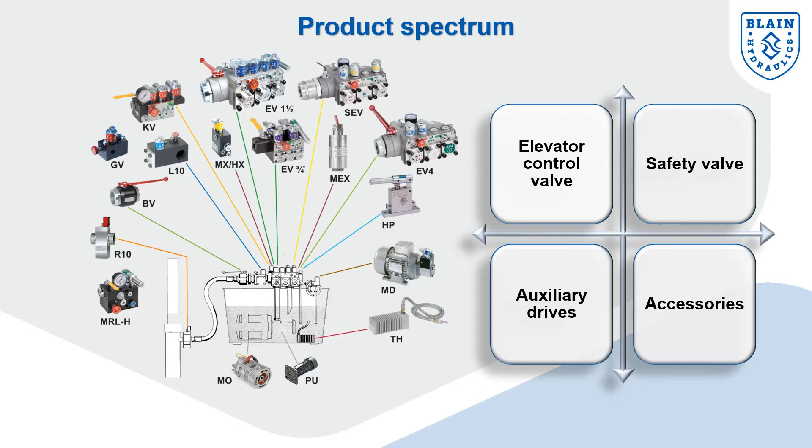The Blain flow control valve is the core of all products. The product segment covers the mechanical, servo and VVVF-driven valves, covering a very wide flow and pressure range. Within the mechanical valve segment, there is a choice of single and 2-speed valves. The EV and KV series offers 4 variants with varying comfort and features.

The servo-electronic valve SEV07 and VVVF valve products, namely EV4 and EV40, are smart valves in their respective categories. The servo-electronic valve is a closed-loop proportional solenoid valve which is controlled by an electronic card. It's an ideal solution for applications where consistent travel comfort is needed independent of change in load and temperature.

The VVVF system works with the Yaskawa inverter and is a closed-loop system. The inverter and the valve are not connected with each other, leaving the customer with high flexibility on the deployment side. A temperature and pressure sensor in the valve relays real-time information to the inverter, which can take corrective action guaranteeing highest comfort and energy saving.

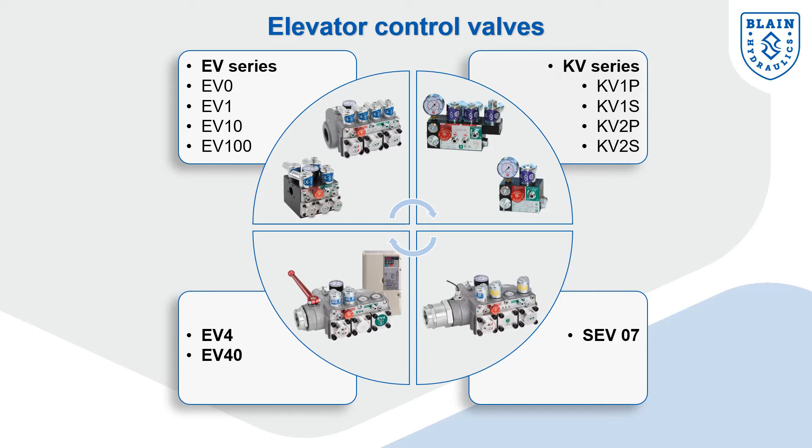EV4 and EV40 are ideal for modernization projects wherein an existing Blain valve can be upgraded to a smart modern VVVF system, offering up to 60% energy savings and ultimate ride comfort irrespective of change in load and temperature.

The safety valve matrix is somewhat similar to the control valve. The pipe rupture valve R10 is available from 0.5 inches through 3 inch sizes with a large range of different connectors and mounting options. Sometimes referred to as a parachute valve, the R10 can be compared to an airbag of a car.

In the event of failure in the main cylinder line or where the downspeed exceeds allowable limits, the R10 valve closes, bringing the car to a smooth stop.

The UCM A3 safety valve is a solenoid-operated check valve designed for hydraulic elevators and includes a self-closing manual lowering valve. Its purpose is to allow free flow of oil from the pump unit to the cylinder for upward travel, and to prevent flow in the reverse direction from the cylinder to the pump until an electrical signal is given to the solenoid. The L10 can be mounted in any position without causing any operational problems.

Like the R10, the L10 is also available in different sizes to suit the flow range of the elevator.

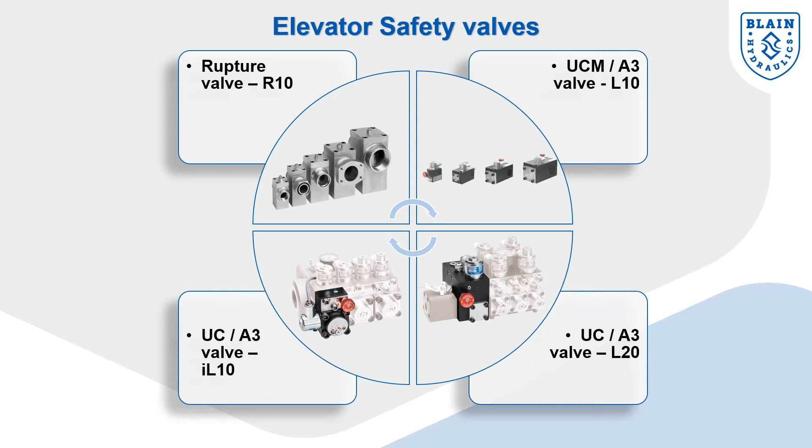Blain introduced the integrated version of the UCM A3 safety valve so as to ease the integration of the product without any extra adapters and fittings. This makes any existing installation very easy to modernize. The integrated option of the safety valve makes the complete unit very compact and reduces pressure losses and heat generation. It also saves the cost of fittings and labor which is otherwise needed to resize or change the existing piping on the site to accommodate the UCM A3 safety valve during modernization.

To round up the product segment, Blain offers a wide range of product accessories that tightly integrate with the main product. For example, the hand pump and the ball valve can be directly mounted on the main body of the valve without the need of any adapters.

Likewise, the MRLH rescue unit can be used for rescuing trapped passengers when access to the machine room is not possible. Other options like tank heater can be tucked away inside the tank by means of onboard magnets and works seamlessly keeping the oil temperature between 20 to 25 degrees Celsius.

Extra downspeed or overspeed valves like the HX/MX can be very useful in testing the pipe rupture valve by simulating a free fall, or even be used in combination with the main valve to have an intermediate downspeed for test runs and inspection of the elevator.

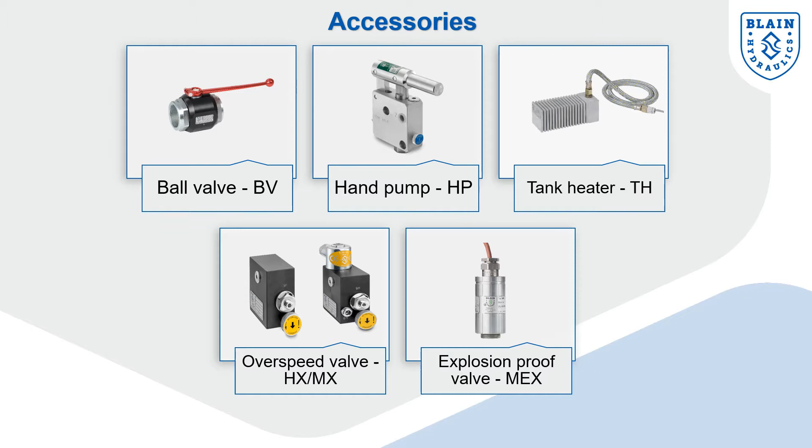For use with equipment and protective systems intended for use in potentially explosive atmospheres, the explosion-proof valve MEX comes in handy. This can be used in combination with any Blain solenoid valve where requirements mandate the use of ATEX-certified explosion-proof valves.

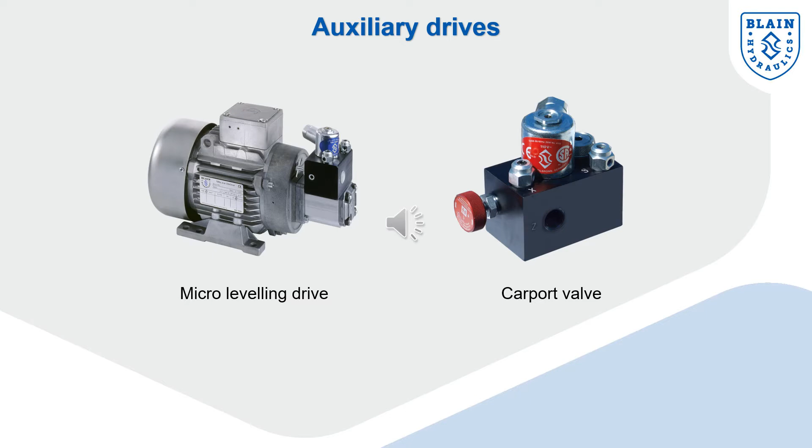Auxiliary drives or standalone units are very useful in fine leveling the elevator or even re-leveling in the event of sinking during loading and unloading of the cabin. The micro drive unit comes as a package made up of the motor, gear pump and the control valve.

Blain also has a standalone version of the valve commonly used for goods lift or car parking platforms.

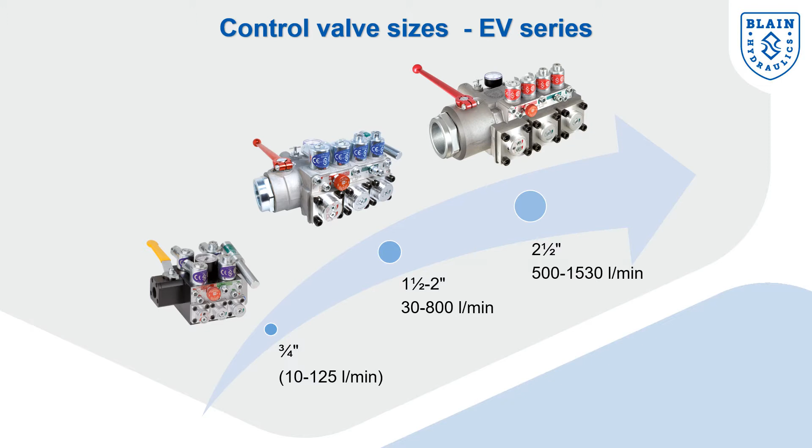The EV series of Blain control valves cover a flow range from 10 to 1500 liters and are available in 4 different sizes. The 1.5 inches and 2 inches valves share the same body but only differ in inlet and outlet ports. For flow range between 400 to 800 liters per minute, the 2-inch valve is recommended.

Options like integrated ball valve in the bigger EV valves can be selected while ordering.

All Blain valves are surface treated and hardened to withstand wear and tear and guarantee long life. A lot of spare parts within the different Blain valves are interchangeable, making it easy for technicians to swap and service the products on site if need be. The front-facing adjustments, lightweight aesthetic and compact design, and working life of over 25 years makes Blain valves the ideal choice for hydraulic elevators.

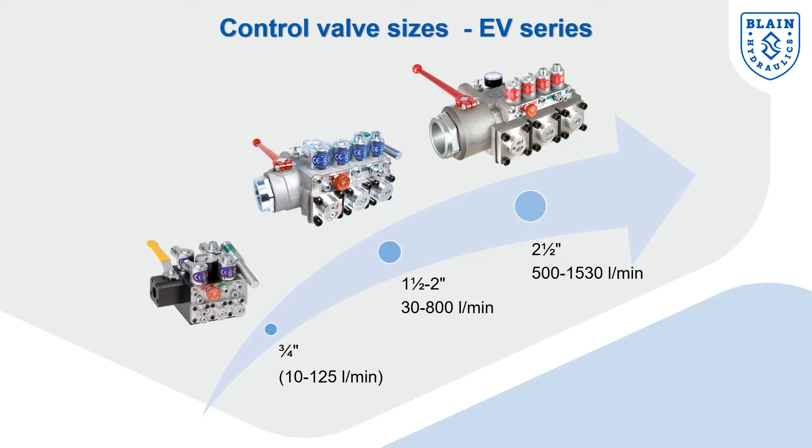The EV series valves have 4 variants, namely EV0, EV1, EV10 and EV100, which can be used in all kinds of elevator applications depending upon the ride characteristics required by the customer. Within the individual variant, different sizes from 3/4 inch to 2.5 inches are available.

The KV series valves are mainly designed for small lifts with single-speed application. It also has 4 variants, namely KV1P, KV1S, KV2P and KV2S, which are used in goods lifts and small home or villa lifts. Even though the KV valves are very small and compact, the design still conforms to the EN regulations.

The most important unique feature of all Blain flow control valves is that they are all designed exclusively for hydraulic elevator applications, unlike competing products which have modular blocks screwed into each other with basic design very much borrowed from the industrial hydraulics domain. The top-to-bottom Blain design results in low pressure losses and tighter integration of necessary options without the need to screw in separate blocks.

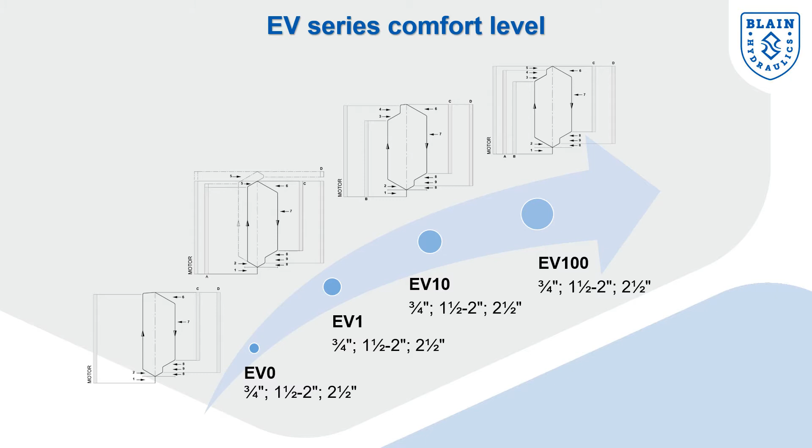These travel graphs show features such as acceleration and deceleration in both directions, number of speeds available, adjustable damping, full speed and leveling speed, with the corresponding adjustment number on the valve. It is clear from the illustration that within the EV series the ride performance and comfort increases from EV0 to EV100. As each variant is available in 4 sizes, customers can select the appropriate size depending on the flow of the pump. The housing of all EV valves is the same, with the difference in internal parts differentiating between the variants. Here we can see the difference in comfort level provided by the different variants of the EV series valves.

These travel graphs show features such as acceleration and deceleration in both directions, number of speeds available, adjustable damping, full speed and leveling speed, with the corresponding adjustment number on the valve. It is clear from the illustration that within the EV series the ride performance and comfort increases from EV0 to EV100. As each variant is available in 4 sizes, customers can select the appropriate size depending on the flow of the pump. It should be noted that the housing of all EV valves is the same, with the difference in internal parts differentiating between the variants.

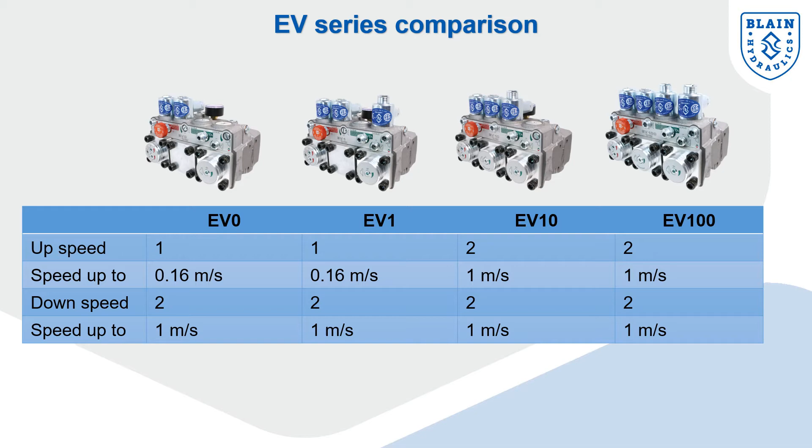One of the main highlights of Blain flow control valves is that the design is highly adaptive to different flow and pressure. It is very important to understand that every hydraulic elevator is unique, and thus to guarantee optimal travel comfort in every condition, the control valve design should be able to adapt to changing operating conditions. Additionally, customers who stock Blain products should be able to take a valve from their shelf and deploy it for any application they desire, without needing to order a new valve, which can take time depending on the location of the customer.

The universal but flexible design of the valves allows anyone to customize the valve within 5 minutes to suit the elevator application in real time.

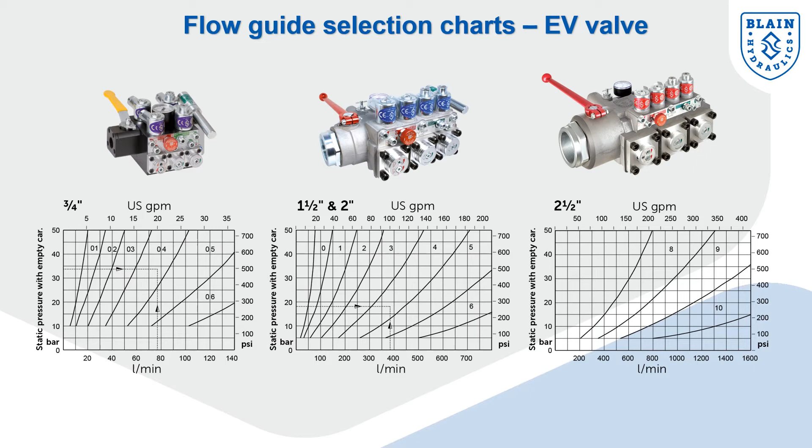Depending upon the minimum working pressure of the system and the effective pump flow, the flow guides are selected using the flow guide selection chart. The x-axis denotes the pump flow in liters per minute and the y-axis denotes the minimum pressure of the system. The point where the two lines intersect on the graph will show the flow guide to be selected.

Flow guides are critical components present inside the valve which influence the ride comfort of the elevator. There are 2 flow guides present in the EV valves, one for the up and the other for the down direction of travel. The difference in the sizes of the slits results in a change of ride quality with respect to flow and pressure.

Customers can also use the online flow guide calculator tool to quickly find the compatible flow guide for their applications, or alternatively use the smartphone app available on the Google Play Store.

This allows, for example, a valve with flow guide 3 on stock to be quickly converted for an application requiring higher flow and pressure. Changing the up and down flow guides only requires opening 4 screws and swapping the spools. Thus, no matter which valve you have on stock, you can quickly customize it yourself to suit your needs.

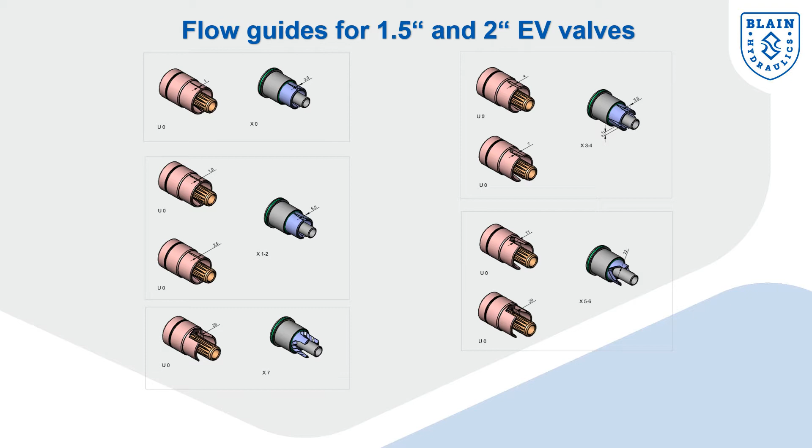The illustration shows the up and down flow guide combination giving the correct compatibility. For example, for a valve to have an up flow guide U3, the compatible down flow guide is X34. Similarly, for a valve to have an up flow guide U4, the compatible down flow guide is X34.

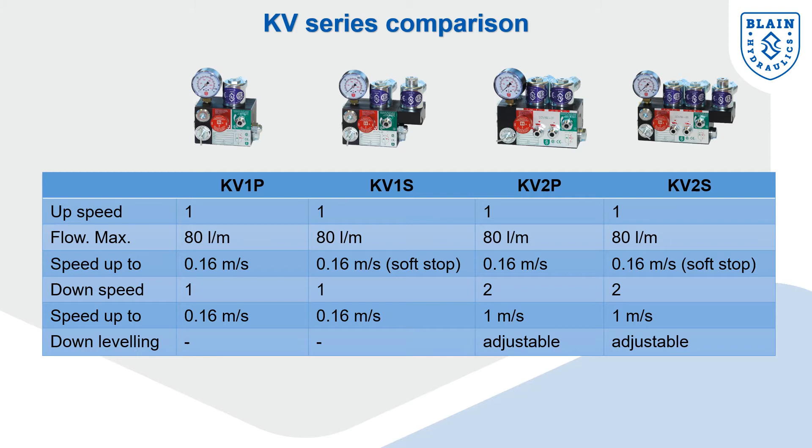The table highlights the permissible speed at which the elevator can travel in the up and down direction using the KV series valves. It gives a comparison showing the difference between the different variants. In combination with the travel characteristics and key indicators, customers can easily select the right variant suitable for their needs.

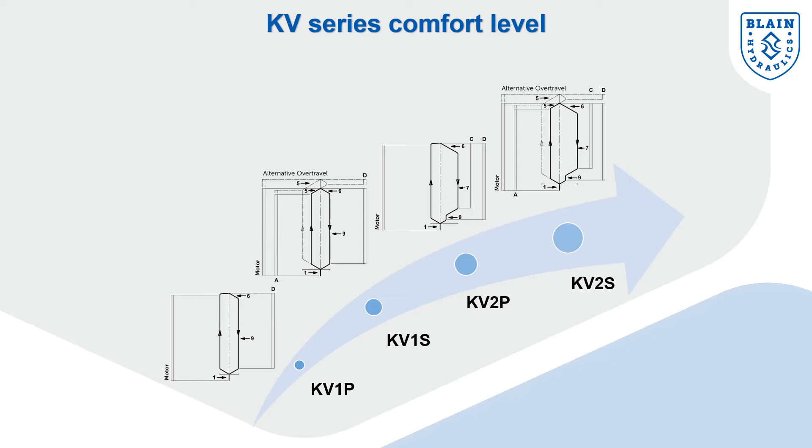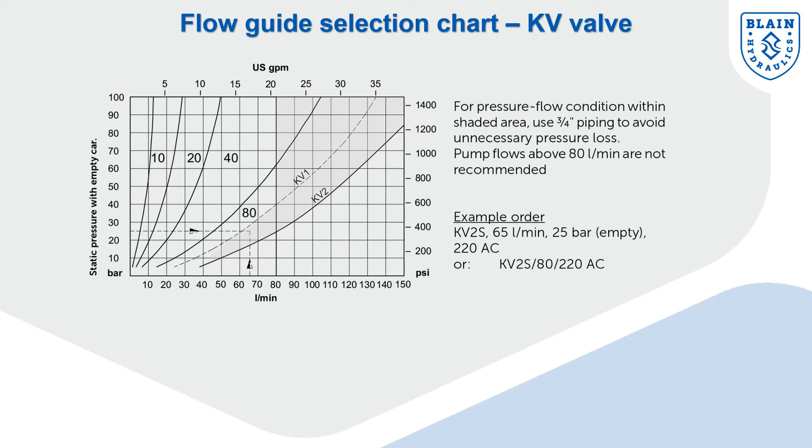It is clear from the illustration that within the KV series the ride performance and comfort increases from KV1P to KV2S. The KV series of valves has a similar flow guide selection chart to what was previously seen in the EV series. The x-axis denotes the pump flow in liters per minute and the y-axis denotes the minimum pressure of the system. The point where the two lines intersect on the graph will show the flow guide to be selected.

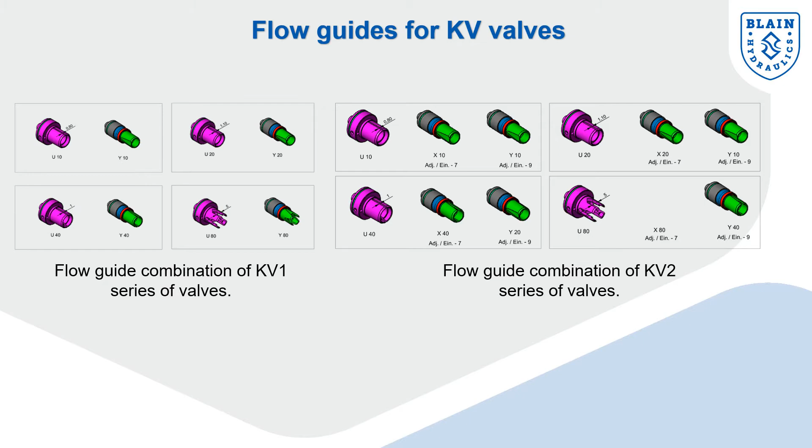For example, for a KV1 valve to have an up flow guide U10, the compatible down flow guide is Y10. Similarly, for a KV2 valve to have an up flow guide U20, the compatible down flow guides would be X20 and Y10.

The Blain SEV valve is a servo-electronic valve which has a closed-loop feedback system and uses an electronic card and proportional solenoids to provide consistent acceleration and deceleration in the up and down travel of the elevator.

The closed-loop feedback and correction system works by getting constant feed from the valve flow meter, temperature and pressure sensor. The real-time readings are then computed against the target, and correction if any is done in real-time by adjusting the solenoid power. This results in constant and consistent travel comfort independent of load and oil temperature changes.

The elevator parameters and adjustments can be made using any smartphone, laptop or tablet on site. No additional software needs to be installed on the smartphone or tablet, as the SEV card itself hosts itself as a server offering a Wi-Fi connection for handshaking.

Different security levels in the software allow access level protection at different levels. The onboard Wi-Fi host can be deactivated once the system is set up and ready, to prevent any misuse.

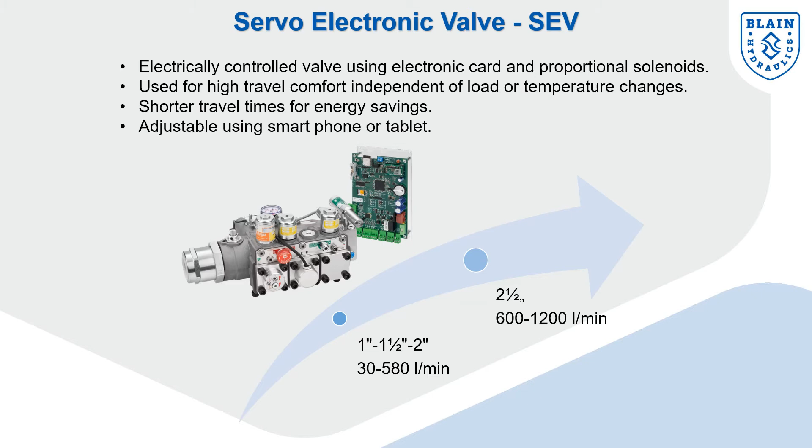Since the travel is controlled through the electronic card, shorter travel time can be achieved with minimal heat generation, and it also results in energy savings for the end user.

Blain valves have been the first choice for hydraulic elevators all around the globe for over 5 decades. A major reason for the same has been the intelligent design which is user-friendly. All the adjustments are front-facing and clearly labeled.

The valves can handle a wide range of pressure and flow, and also leave room for customization and modernization if required. The valves can be easily inspected during operation by inspection authorities.

The solenoid coils, which are 100% ED, are available in different voltages for both AC and DC types. Along with the main products, the accessories are designed such that they can easily dock on the main product with minimal or no extra fixtures.

The interchangeable spare parts are also readily available and can be ordered online. The valve configurator and necessary tools for calculation of elevator data can be easily accessed using the Blain website or through a smartphone app. Help is just a few finger taps away.

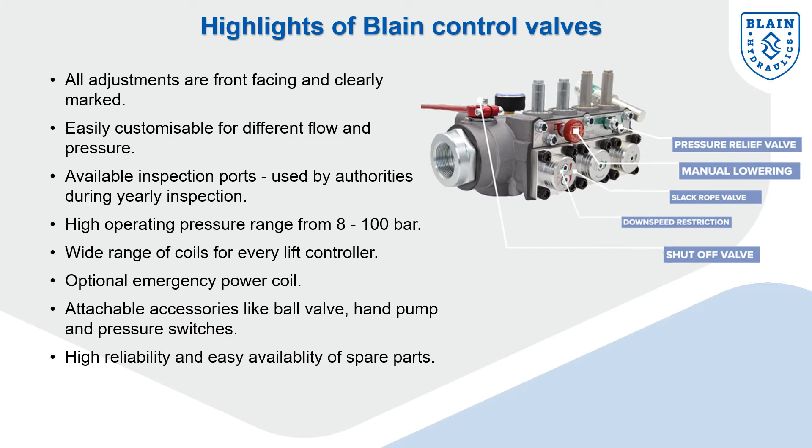In case of troubleshooting, help in the form of video instructions is readily available in the smartphone app or on the website. As indicated previously, the Blain rupture valve is a safety valve that brings the car to a smooth stop in the event of hosepipe failure of the main cylinder line, or where the down speed exceeds allowable limits.

The design of the product allows it to be mounted in any position on the cylinder. That said, the product has clear markings on the ports, marked as Z for cylinder side and T for tank or valve side.

The sizes from 0.5 inches through 3 inches cover a big range of flow, from 4 through 2100 liters per minute. The available options of different ports in combination with thread types, adapters and fittings hardly leave anything uncovered. On request, special port and adapter combinations can be made to suit specific needs.

For installations where multiple cylinders are used in an elevator, an option of double piston (DK) is available. Multiple rupture valves are interconnected using this port so that in the event of failure of any one connection line, all the rupture valves trigger simultaneously to maintain the balance of the cabin.

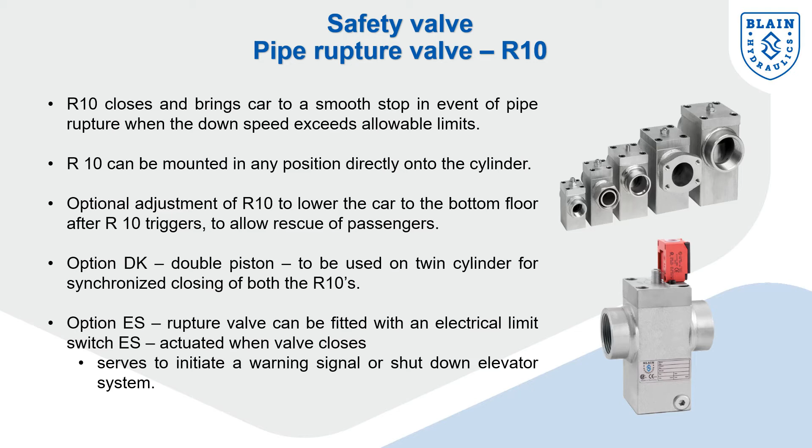Additional options like an electrical switch or extra lowering adjustment are also available should there be a need for the same. As a safety device, Blain rupture valves are certified in accordance with EN 81 and ASME safety directives, guaranteeing an absolute fail-safe product.

The rupture valve is one of the most important yet simplest products in the complete elevator system. The simplistic maintenance-free design makes it a fix-it, forget-it product.

On the operations side, it follows the pressure differential principle, in which the safety valve reacts to excessive flow arising due to difference in pressure between the cylinder and the valve or tank port. In the event of pipe rupture, the connection between the rupture valve and the control valve is no longer pressurized in comparison to the pressure between the rupture valve and the cylinder.

Thus oil rushing through the inlet on the cylinder side pushes the piston up to close the passage, thereby preventing any more oil flow from the cylinder to the valve side.

Adjusted by means of a simple screw on top, turning it clockwise allows the valve to be adjusted to handle higher flow, and counter-clockwise to be triggered at less flow. The illustration gives an overview of how much flow can be regulated by turning one turn of the screw with respect to the size of the rupture valve.

The trigger flow in return has to be derived by adding 0.3 meter per second, or 59 feet per minute, to the nominal elevator speed and calculating the flow at that speed. For further technical details, please refer to the information available on the Blain website and in the product catalog.

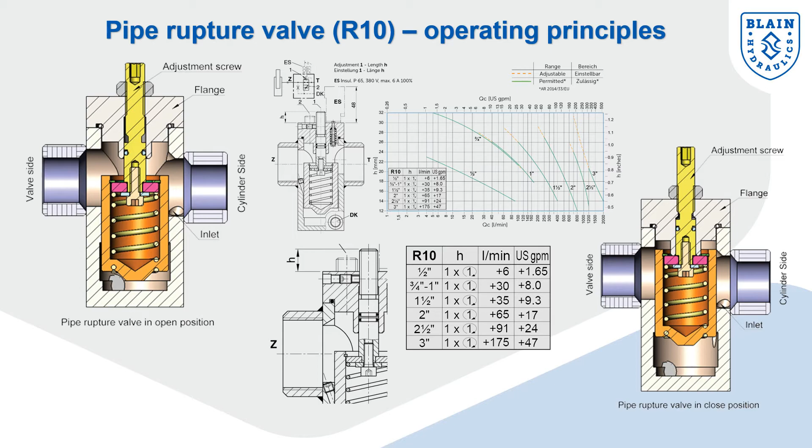The pressure lock valve, or more commonly referred to as the UCMA3 valve, has been a popular Blain product for decades before it was made a safety component with the A3 amendment in the EN 81 elevator code. The L10 valve is basically a solenoid-operated check valve installed with the purpose of allowing free flow of oil from the pump unit to the cylinder for upward travel, and to prevent flow in the reverse direction from the cylinder to tank until an electrical signal is given to the solenoid.

Thus, it acts as a redundant secondary check valve, adding an extra layer of safety in the event of unintended car movement happening in the down direction. A manual lowering for emergency rescue in the event of power failure is a standard option available on every L10.

The slack rope valve for roped elevators is available as an optional feature. Customers also have a choice of ordering the L10 with an emergency lowering coil, to which a battery power supply can be given in case of power failure.

Since the product works independent of the main control valve, it can also be used together with any other make of control valve, giving the required flexibility.

As a safety device, Blain UCMA3 valves are certified in accordance with EN 81 and ASME safety directives, guaranteeing an absolute fail-safe product. For further technical details, please refer to the information available on the Blain website and in the product catalog.

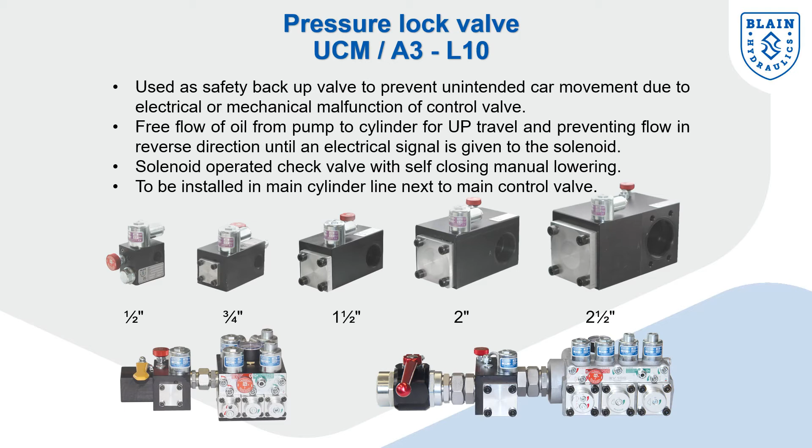The hand pump is a simple device that is used in emergency for pumping the hydraulic elevator upwards. In the event of a power failure or during emergency when the elevator cannot be brought down due to unavoidable reasons, the hand pump is used to manually push the elevator cabin upwards to the next floor level.

The H11 is constructed for side mounting and can be docked onto any EV valve irrespective of size or type. The H12 is a standalone version and can be fitted with a baseplate for separate application.

The built-in pressure relief valve should be adjusted to prevent unintentional high pressure being applied to the system. A built-in manual valve for releasing pressure from the system is available as an option in the H12 variant. All Blain hand pumps have a built-in check valve as standard.

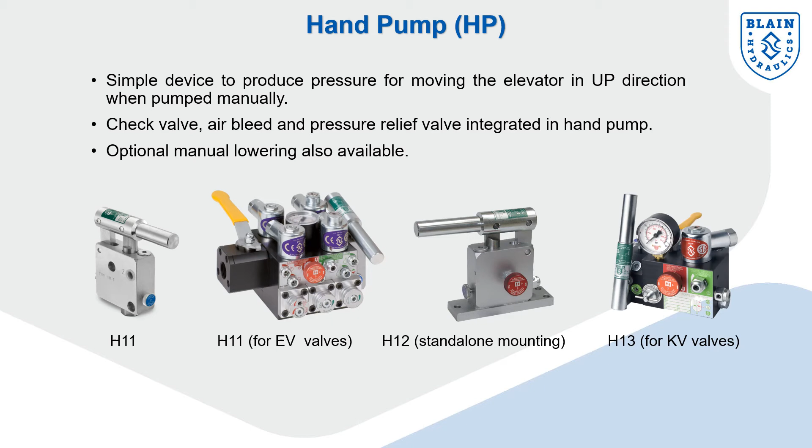Through each full suction stroke of the hand pump in the H11 and H12 models, around 13 cubic centimeters of oil volume can be pumped into the cylinder line.

If the machine room of a hydraulic elevator is in a potentially explosive environment which has the presence of explosive gases or traces of flammable chemical particles in the surrounding atmosphere, it becomes very risky to operate any electrical devices which could cause sparks in case of a malfunction.

Generally, anything that can cause sparks or flames is strictly prohibited around gas stations, ordnance factories, chemical factories, oil and gas refineries, offshore oil platforms and ships, to name a few. Everything that operates in such an environment has to be flame-proof or explosion-proof so as to not be the source of catastrophic explosion and fire.

Such equipment has to be tested and certified as per stringent standards laid down by the industry. Hydraulic elevators are no exception if they are installed in such a location.

Since the flow control valve has electrically operated coils, Blain offers an explosion-proof solenoid valve which is certified in T4 class to operate risk-free. The normal solenoid valve and coil on the valve is replaced by the MEX explosion-proof coil, which is certified as per ATEX standards.

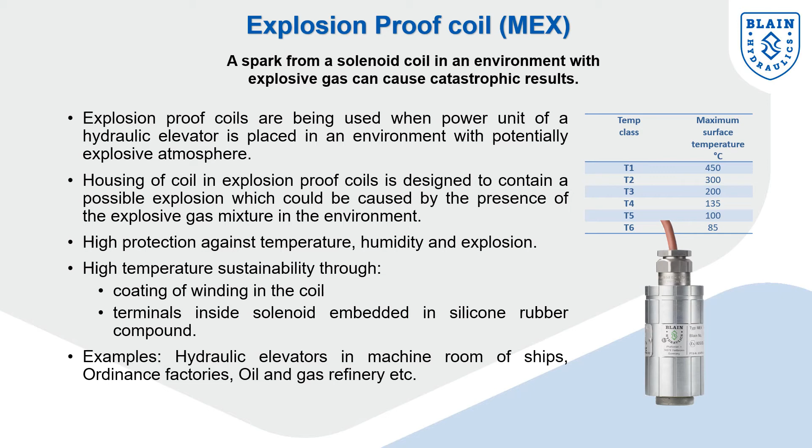This provides adequate protection against high temperature and humidity due to special coating and silicone rubber compound used for the terminals. The temperature and viscosity of hydraulic oil is very important for hydraulic elevators as it can affect the ride characteristics. In places where the temperature is low, the viscosity of the oil increases, which is undesirable.

This can be avoided by using tank heaters which help to maintain the temperature of the oil and thereby maintain a constant viscosity. The heater senses the change in oil temperature by means of a thermostat at 20 degrees Celsius and begins to heat the oil until it reaches 25 degrees Celsius, after which it switches off. This ensures that the working temperature of the oil is maintained for ideal operation of the elevator.

The heater is also compatible to work with an external thermostat for triggering the operation. The cable is protected over the submerged length by an oil-resistant hose which prevents any damage being caused to it.

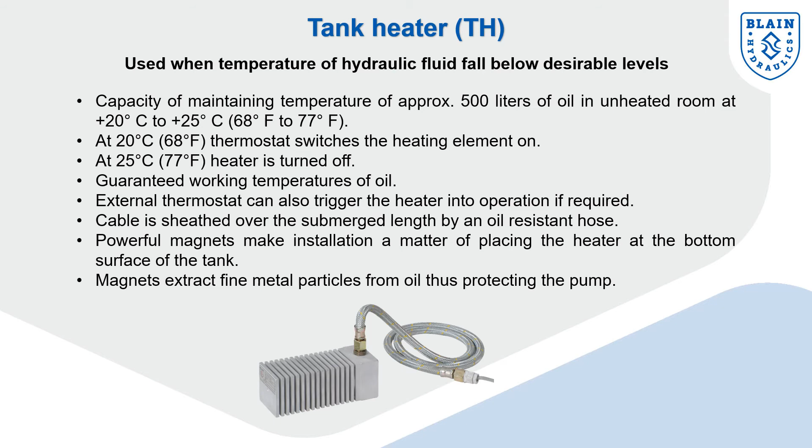The heater doesn't require any additional fixture for installation since it comes equipped with powerful magnets which allow it to be placed at the bottom of the tank without any difficulty. These magnets also attract impurities in the form of tiny metal particles which may otherwise cause damage to the pump and other devices.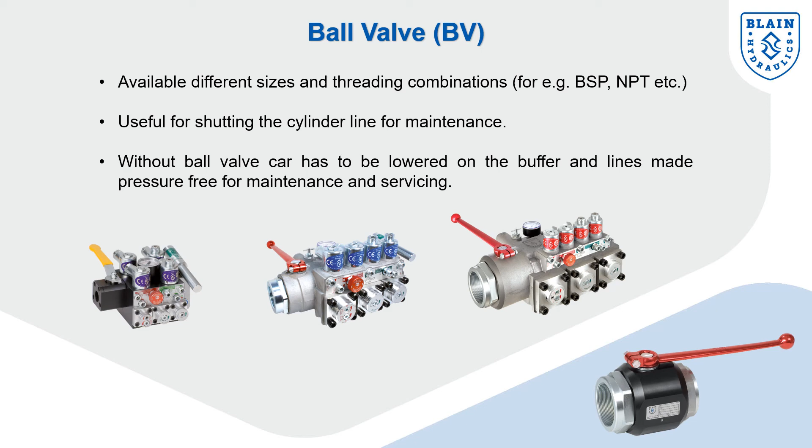The ball valve serves as an important accessory during servicing and maintenance of a hydraulic elevator, as it helps to isolate the hydraulic cylinder and the hydraulic power pack. Without the ball valve, the car would have to be lowered on the buffer and flow lines would have to be made pressure-free.

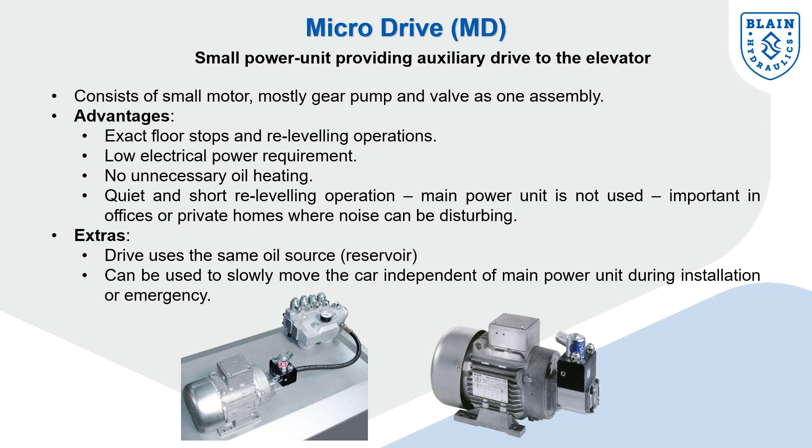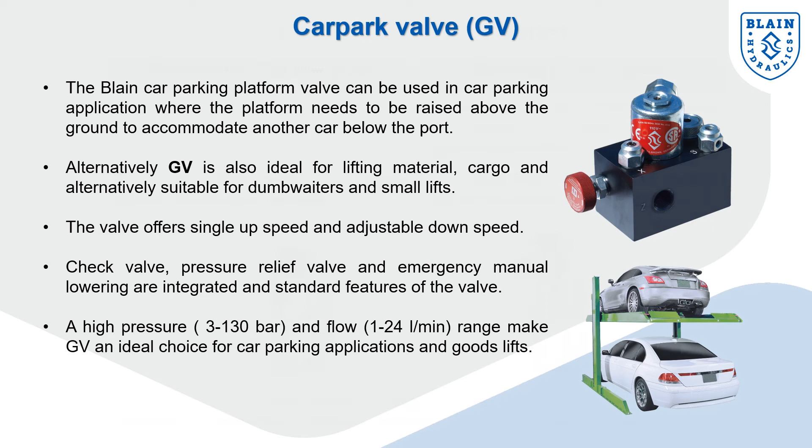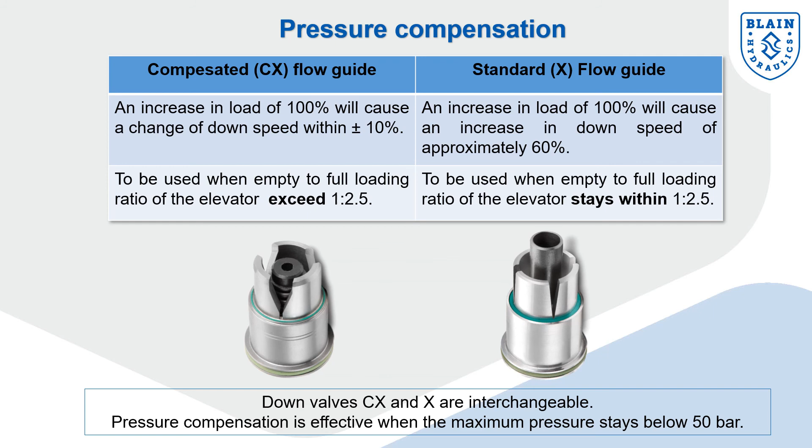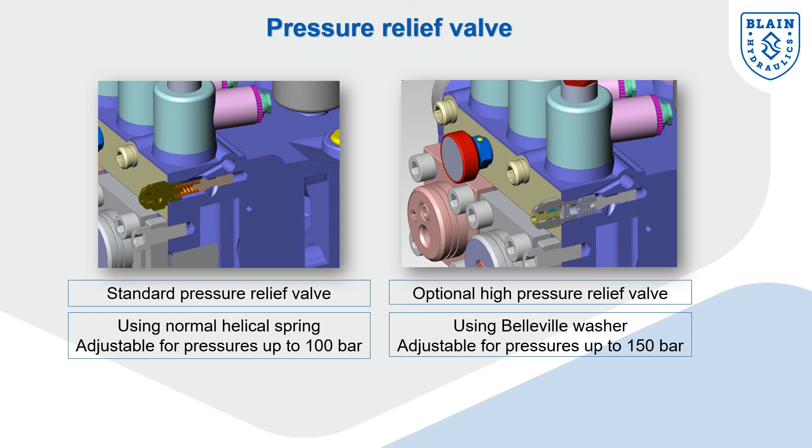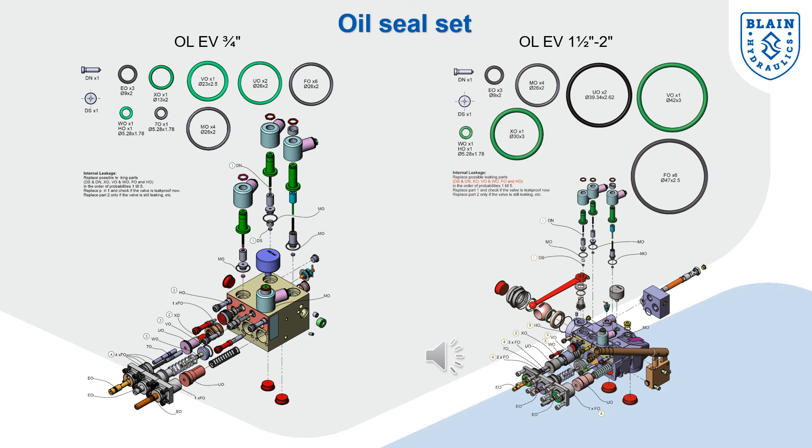The oil seal kits come with an oil seal template which has an explosion diagram of the valve block along with a seal diagram drawn in 1:1 scale. This makes it easier to identify the position and type of the oil seal to be replaced during servicing and maintenance. The diagram highlights the sequence in which oil seals should be changed, helping anyone who may not be aware of Blain valve design complete the task without mistakes in the least amount of time.

Power outage can result in people getting stuck inside the elevator until rescued by emergency services or elevator technicians, both of whom may not be immediately available depending on the situation. Apart from the emergency manual lowering which is present on the Blain flow control valves, there is an alternative and automatic solution to lower the cabin electrically.

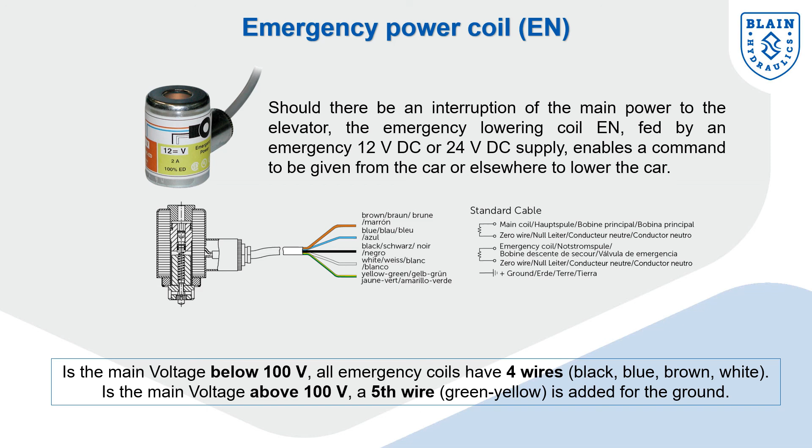The emergency EN power coil can be actuated by providing an emergency 12-volt DC or 24-volt DC power supply through an external source such as a battery. Most standard lift controllers are pre-programmed to handle such situations. This enables the car to be lowered automatically in case of primary power supply disruption, rescuing the passengers without any human intervention.

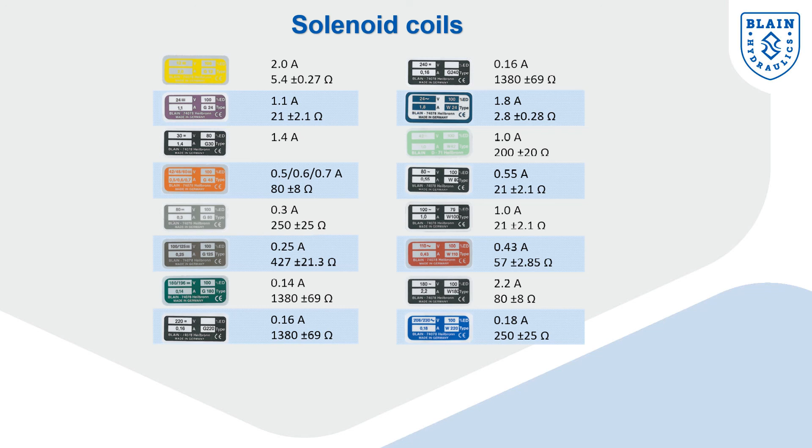Blain Hydraulics believes in manufacturing products which can be easily adopted and deployed by customers globally. A wide variety of solenoid coils with varying voltage and current, available in both AC and DC options, allows the customer to cater to all requirements without the need of customizing the lift controller or adding extra transformers or inverters. This is a cost-saving advantage for the customer, who can easily select from the wide variety of different voltages and connecting cable lengths suiting their needs.

We hope the webinar would have given you some important insights into Blain products, its capabilities and availability of different options. Please do not hesitate to contact us should you have any questions or need further clarifications on our products. We thank you for your time and interest in Blain Hydraulics.